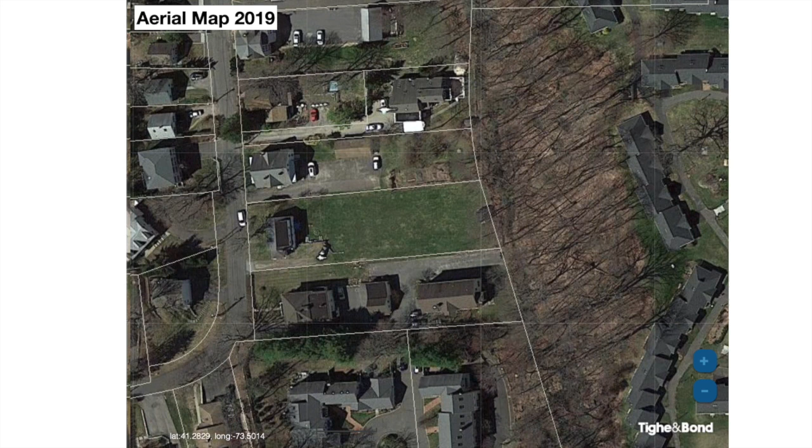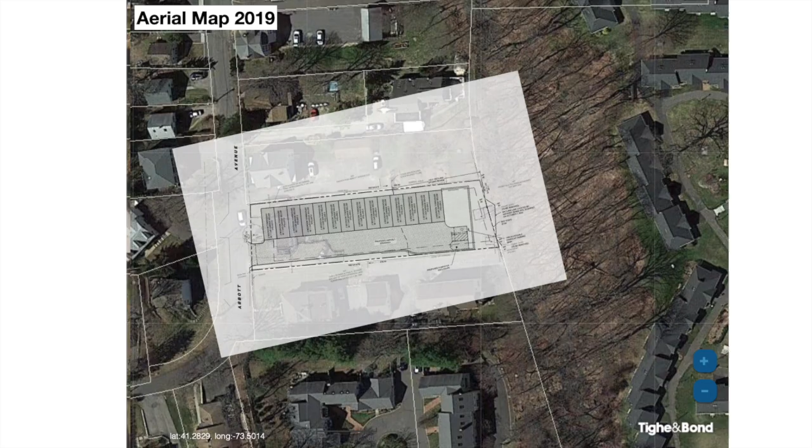Ridgefield's Inland Wetlands Board holds its third hearing on July 13th, 2023, on a very controversial application for a project at 27 Abbott Avenue, adjacent to a very sensitive wetlands and flood area, on .44 acres, 14 apartment units over garages. This kind of density in this location raises legitimate public concern and tests the Inland Wetlands Board's authority to protect this environmentally sensitive and valuable resource.

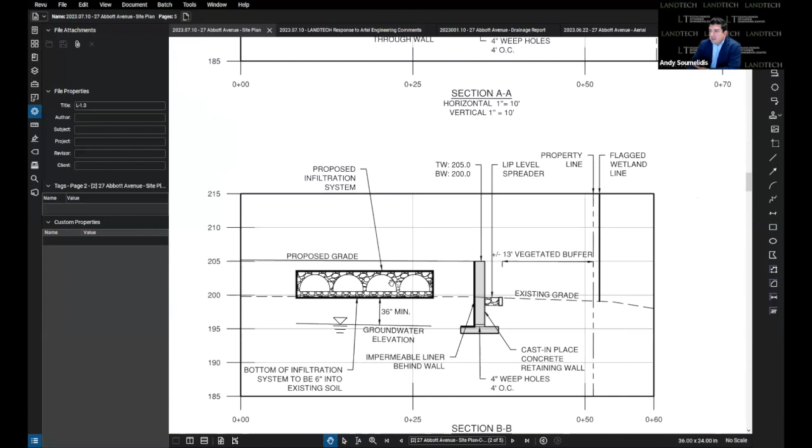And I think Mr. Verbickus actually had that as one of his comments with the saturated soils beneath the infiltration system, what's going to happen? And it goes back to those weep holes. So in section form here, you could see the bottom of the system, that 36-inch separation, gets into your groundwater, but there was concern about horizontally, where's that water going to go versus vertically.

We had a liner put in behind the wall. The purpose of the liner is so infiltration doesn't come out at a higher elevation, and making sure all this soil does go vertically down and get the proper treatment. We set the weep holes down below that 36-inch treatment level. So you get the treatment, the stormwater runoff has the potential to get into the groundwater, as mentioned earlier. Or on lighter storms, it just stays in and then dries out over time.

But these weep holes allow it to connect to existing soil conditions on the other side where we have our vegetated buffer. So that's how we're not really building a bathtub, by allowing the waters to, after treatment, migrate towards the wetlands. And these weep holes are 4 feet on center. It's very typical of this type of design.

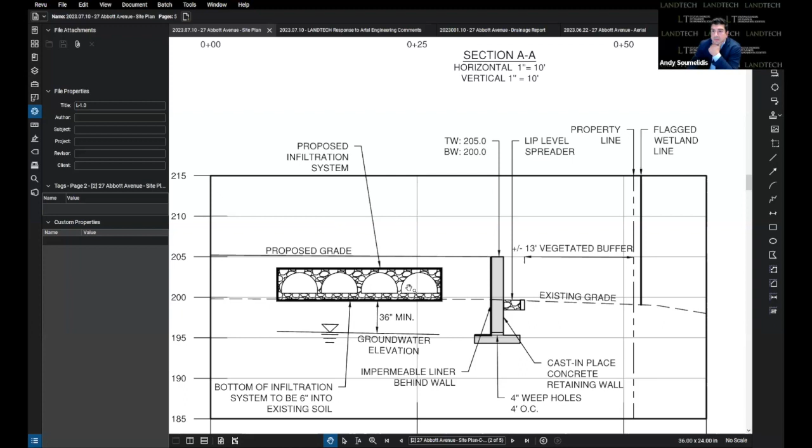In septic design, it's very typical also when you're building a retaining wall next to a septic system. This is acceptable by the Connecticut Public Health Code for septic design. I know this is not a septic system, but I'm just giving you an analogy of how this operates and works with the weep holes.

Another comment that came up was the deep sumps with hoods not providing sediment removal. The 2023 manual specifically states that deep sump hooded catch basins provide a high pollutant removal for sediment, including sediment-bound pollutants and floatables, quote unquote. So the deep sump hooded catch basin, probably their biggest pre-treatment function is the removal of sediments. And that's why we went with the 4-foot deep sump with the hoods in a parking lot, right?

That will be, like we just mentioned, snow plowed, and potential of sand being put on there and sediment from cars migrating onto site. So the deep sump hooded catch basins is one of the preferred methods of the 2023 stormwater manual, the draft manual that we keep referring to. Another question came up regarding the time of concentration. I'll share my screen again and pull up the drainage report.

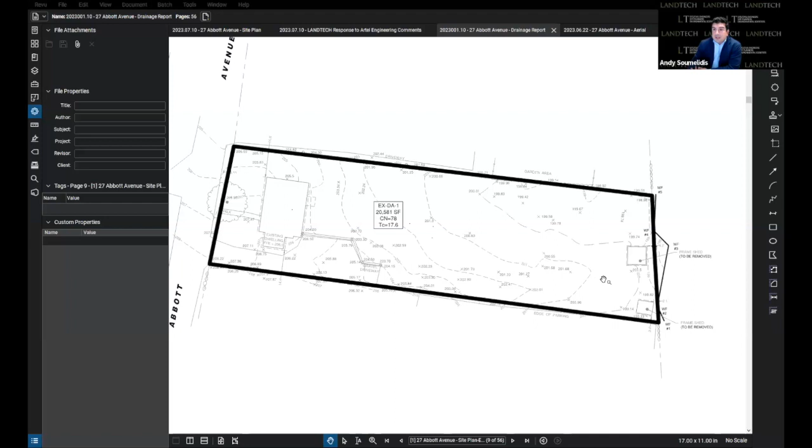Here's your existing condition T sub C of 17.6. We could use that same theory that Commissioner Pilch said about taking this highest point in the longest travel path. So the T sub C is the time of concentration a drop of water falls within that watershed and gets to a point in the watershed. We took this point over all lawn area to get into the wetland system, a time of concentration of 17.6. We could easily take this paved surface, the end of the driveway, flowing over the lawn as a time of concentration also, if that's the theory behind that.

When you go to your proposed condition, this whole dark area is all our impervious surface, the roof and every inch of new impervious surface on our piece of property, with a T sub C of 5.0. This little strip here and the wetland system back here and a little bit up here, we got a time of concentration of 16.6. So that's a drop of the water that falls here and goes parallel with the building and then gets into the wetland system. This area is 4,591 square feet.

You could most likely put this at a T sub C much lower if needed, and it won't move the needle in our model. It's not going to change the peak runoff flow. It's just such a small area and it's all pervious surface. If it was an impervious surface, I'd understand, but this is all lawn and grass area, and that's the path it takes for this little bit of area, because this area does not get into our detention system. It travels over land and off our site. So that's regarding the time of concentration comparison.

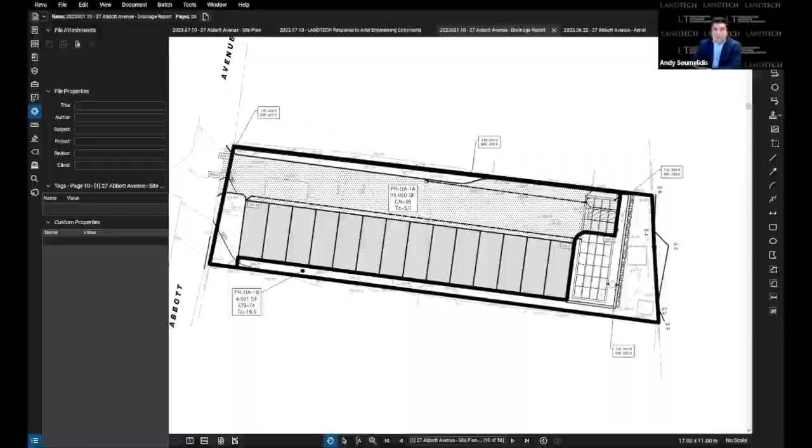I know Commissioner Pilch wants Mr. Verbickas to look at it as well, but I just want to respond to some of that. The last one, I think, was the 10-year storm. And I think Mr. Verbickas said it as well. The 10-year storm gets up to elevation 202 point, let me pull it up so I have the exact number elevation-wise. It is 202.49.

So in a 10-year storm, this system: roof runoff goes into the gutters, into the underground detention system. Runoff from the parking lot goes into the catch basins and into the underground detention system. And it gets up to an elevation of 202.49. Mr. Pilch said there would be concentrated flow coming out of our system. That won't happen. Our catch basin top is 204.5.

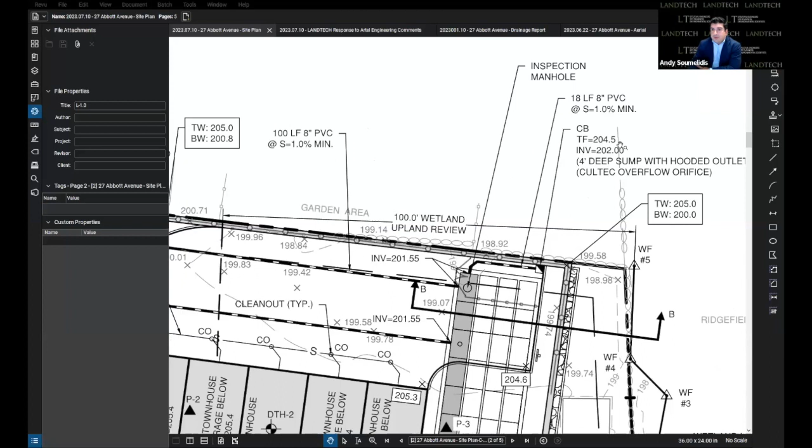So this runoff will sit in the pipe system. It'll infiltrate over time into the soils below. It'll outflow through our outlet here over time and dissipate. So there won't be runoff coming out of this catch basin and concentrated flow going and providing erosion or anything at the surface. This will all stay within the piping system. This catch basin here is at 205. Our roof leaders are up at 205.

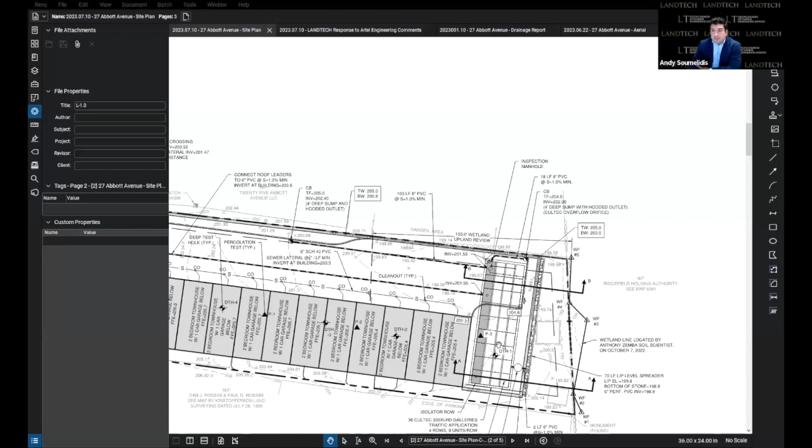It's not going to be bubbling out of our roof leaders or our catch basins. It will sit within these systems. And yes, it will fill these pipes up, but it's not coming out of the top of the catch basins. And then it'll slowly infiltrate into the ground over time and then be metered out through our level spreader. So there is no point concentration coming out of our system in a 10-year storm.

And I think lastly, we keep talking about the percolation versus permeability testing and what's the appropriate practice. We always use percolation tests for sizing of stormwater systems. I bet if you ask Mr. Verbickus or even Commissioner Pilch if he's used percolation tests in sizing and building detention systems, they'd both tell you yes. It is a normal practice to do percolation tests.

So I know we keep pointing to the 2023 manual, but I just want to point out there's other things in the 2023 manual that go in a different direction, i.e. there's ways that you don't need 3 feet of separation from seasonal high groundwater. You can have 2 feet of separation. So if we're really going to point to the 2023 manual and that's the guideline, we need to know that so we design appropriately, because then there's other methods we can apply that are actually favorable.

I think we're just picking out the things that are detrimental, for lack of a better word, but there's things in the new manual that actually allow you to do other things stormwater-wise that can make it a better plan and less restrictive, I would say. So if we're going to really point to that 2023 draft plan, there's other things within that plan. If we're allowed to point to that document, I'm more than happy to use it and apply it here.